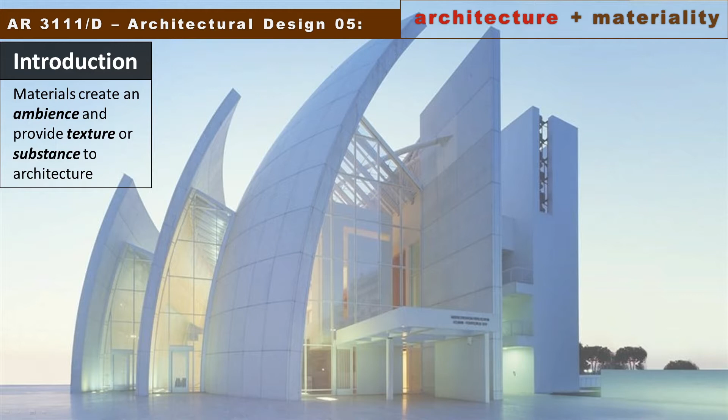Like a painter that uses different media to express his thoughts and imprint his style into his paintings, architects use materials to create an ambience and provide texture or substance to architecture, as can be seen in this rusty tin shed transformed studio in Sydney by Raffaello Rosselli, exemplifying material honesty.

Recycling the original corrugated metal sheets as a material palette in this composition provides its rustic industrial character, while the glass corner window implies modern formality. The wood planks of the gate bring it closer to nature.

In contrast, the Leslie L. Dan Pharmacy Building by Foster and Partners for the University of Toronto features a 20-meter high colonnaded circulation daylit space as a hub of undergraduate activities, encouraging interaction between students.

The main space owes its lightness and elegance to the use of glass and steel, as can be seen in its glazed facade made of frit glass.

Its main attraction is the two reflective silver-colored pods suspended within the main space, which change colors according to the light conditions, with LED lighting illuminating the pods, casting tints of hues on its sleek glass facade amidst a towering concrete colonnade, providing a striking focal point for the building.

You would see by the examples that different architectural characters can therefore be achieved through the use of different materials. Moreover, the availability of building materials dictates the construction methodology to be adapted for structural, functional, aesthetic, and of course economic concerns. So for me, materials and construction for architecture is a matter of architectonics.

To understand how to use materials effectively, a designer needs to have an understanding of precedent, or how materials have been used historically, and an awareness of innovations in material application. Both can provide a useful way to develop a range of design approaches.

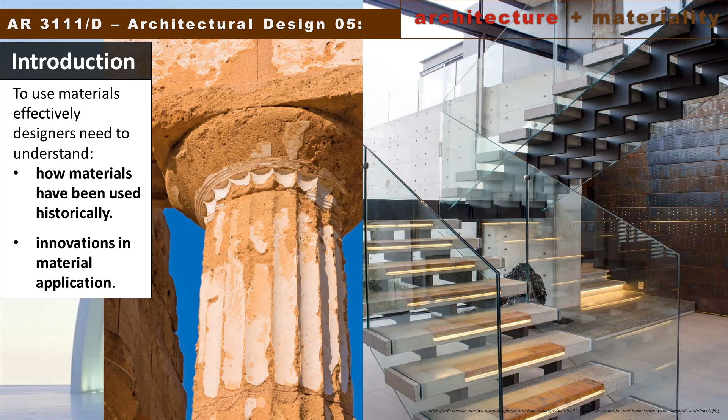Thus, for an architect, a sound understanding of construction methods and practices is essential. The architect needs to understand the nature of materials and their possibilities and limitations before they can be used to create buildings and spaces. Therefore, both history of architecture and building materials and construction courses are important parts of the architectural curriculum.

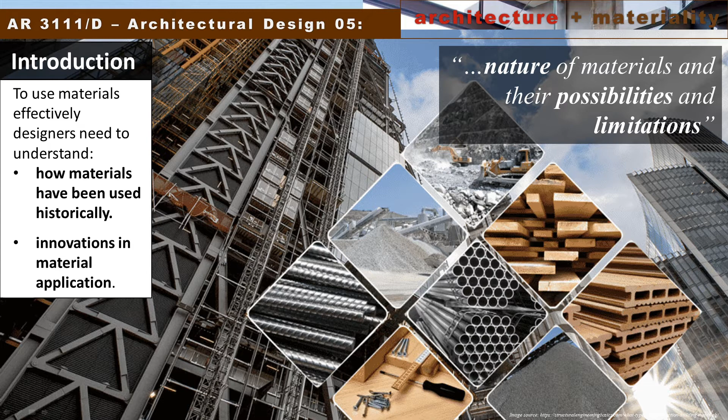And just to recall some of the types of building materials we covered in your history and building technology subjects, we discussed some of the types of materials, starting from brick and stone, concrete, timber, glass and steel, and composite materials. And to look back on our architectural history, here are just some of the chronology on how these materials were used.

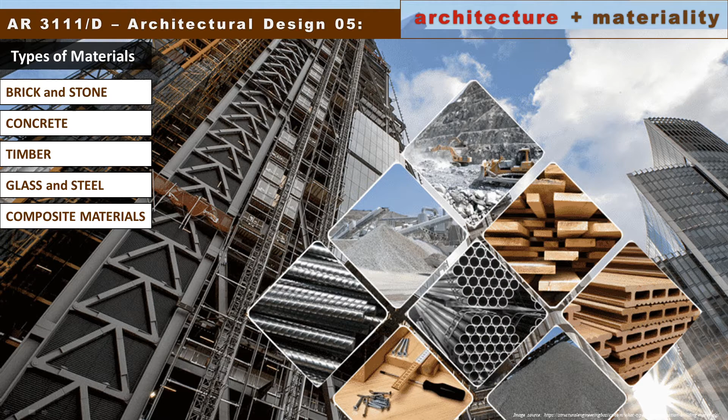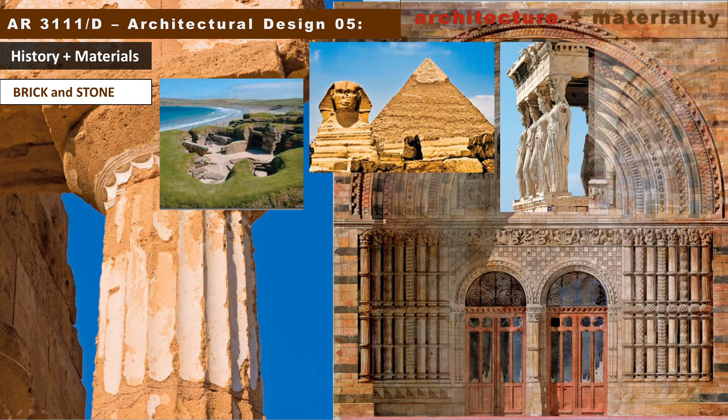Starting from brick and stone as used in the Neolithic era, ancient Egypt, classical Greece and Rome, medieval times, Renaissance, and to the modern times, we can see that stone has long been associated with permanence and solidity, thus providing the monumentality in the architecture of ancient civilization.

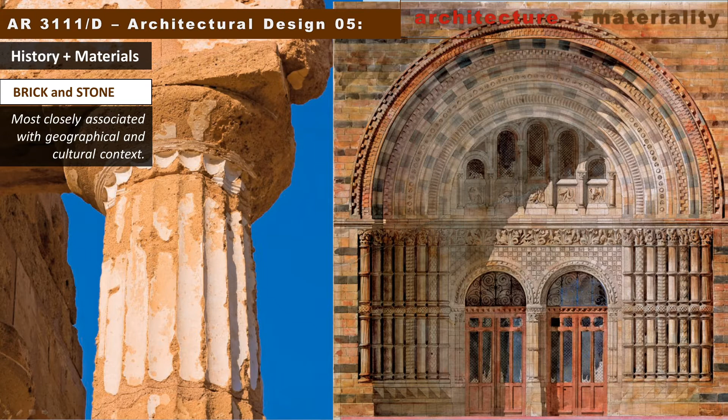Of all materials available to the architect, it is arguably the use of stone and brick that produces an architecture most closely associated with its geographical and cultural context, like in the Hoshino Stone Church by Kendrick Kellogg in his interpretation of organic architecture with the use of local stone, both for the interior and exterior.

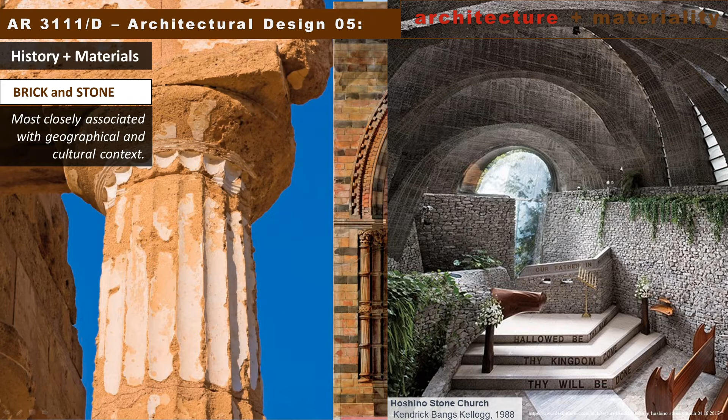We could see that both stone and brick can be used in a range of architectural applications, as both materials have a load-bearing potential to support their own weight or even more. They are used most effectively in constructing walls and for floor surfaces.

The Sagrada Familia by Antoni Gaudi, whose construction began in 1882 and is still to be completed, hopefully by 2026, was designed to challenge ideas of structure and celebrate the most incredible craftsmanship—that is, to carve and transform stone from a solid static material to a dynamic, expressive surface.

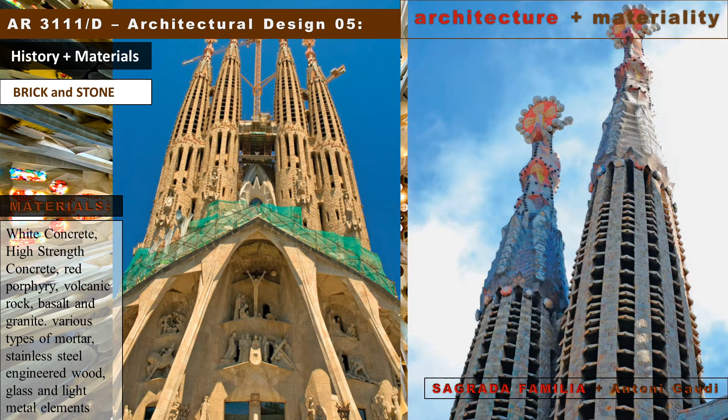White concrete was used for pillars and the surrounding walls, whereas high-strength concrete is used for pilasters, foundations, and pavements. Inside the basilica are long columns of red porphyry volcanic rock, while the small and dark columns are made of basalt and granite columns that project the exterior light.

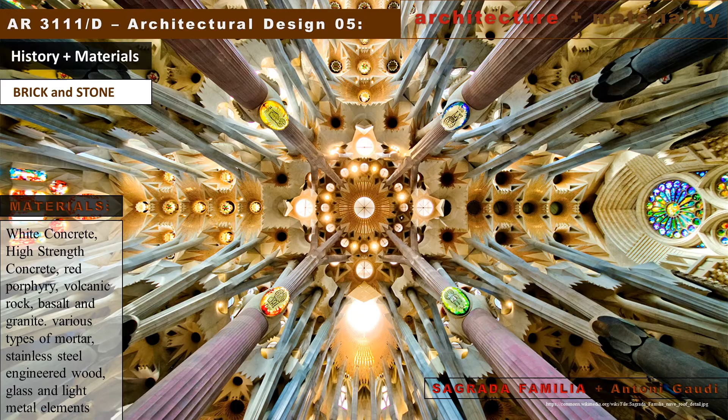This building exemplifies the potential that stone offers the architect, and the real possibility its use presents to create symbolic, iconic, and memorable structures. This leads us to our second material, which is of course the Roman invention of concrete.

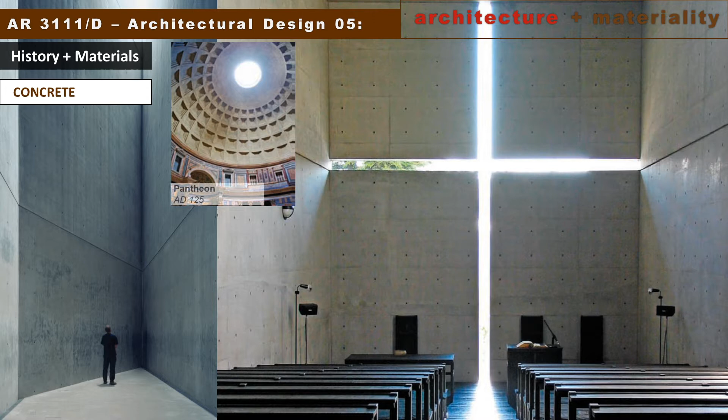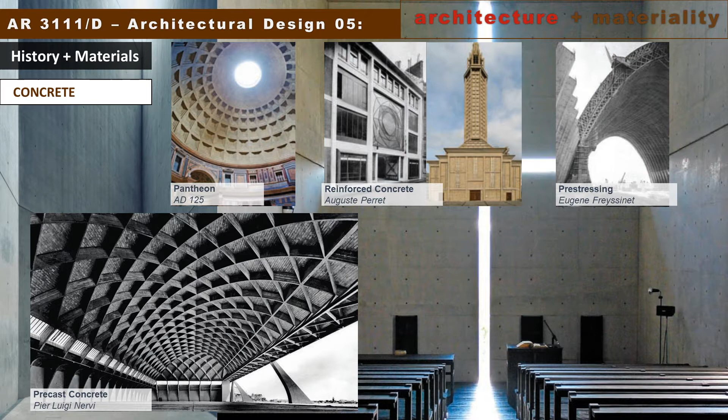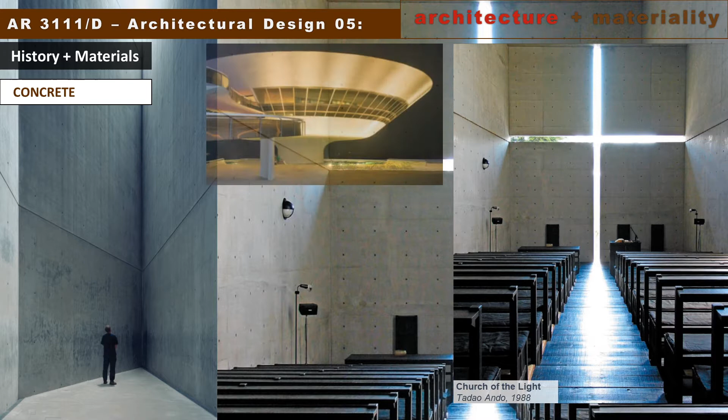From the Pantheon, the reinforced concrete of Auguste Perret, the pre-stressing technique of Eugène Freyssinet, with the reinforced and precast concrete technologies of Pier Luigi Nervi, to the expressionist form of Le Corbusier with his béton brut aesthetics, to the geometry, light, sculpture, and minimalism of Tadao Ando, to the futuristic space-age form of Oscar Niemeyer, the captivating designs of Santiago Calatrava's architectural structures, and to the dynamic sculptural organic forms of Zaha Hadid.

And the possibilities are limitless. You would notice that concrete offered the architects a material that could be molded to form new shapes, and one that, when reinforced with metal, could be used structurally to challenge ideas of building, form, and scale.

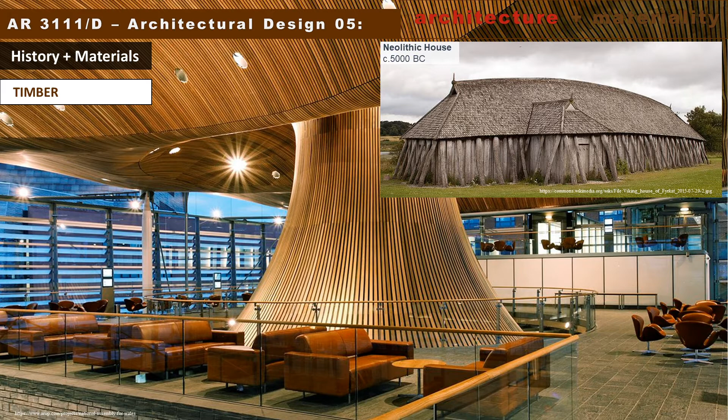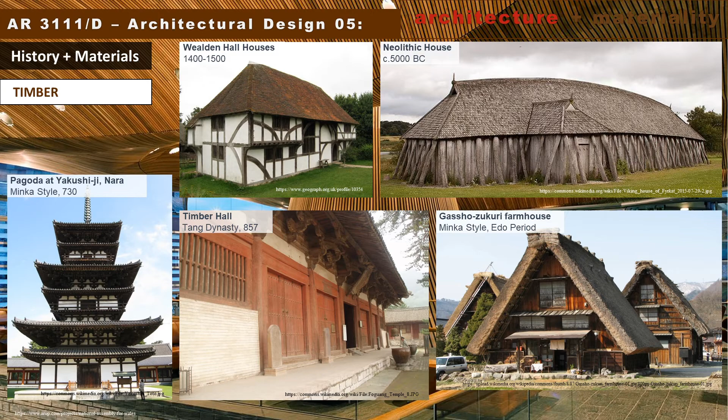We also have nature's best offering, timber. From simple thatch shed to the Neolithic longhouses of the Vikings resembling a ship, to the impressive intricate architecture of China and Japan, to England's Wealden houses for the yeoman classes, to the complex facades of timber-framed Tudor houses.

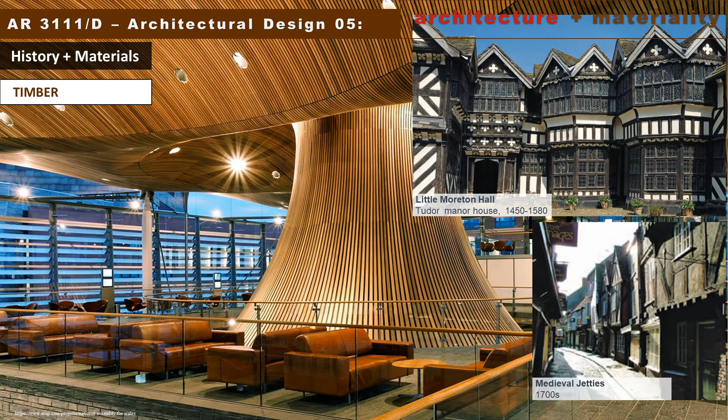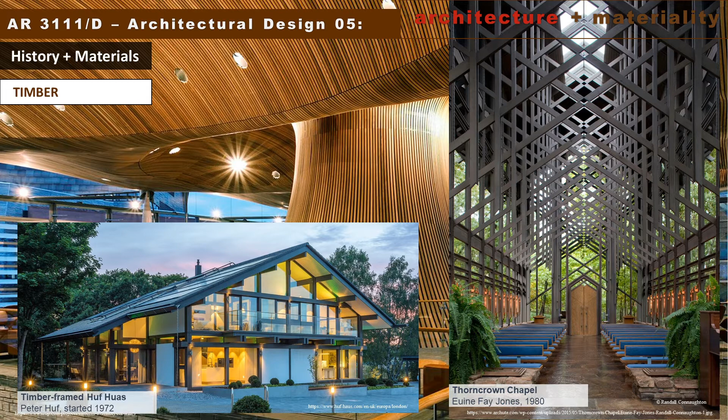To the static effect of overhanging timber jetties, to the American craftsman style design of Charles and Henry Greene for the Gamble House, to the factory-built timber frame houses of Huf Haus Company, which are individually crafted, to the remarkable glass and wooden structure of Euine Fay Jones.

Seen in his Thorncrown Chapel with its rhythmic wooden columns and trusses, to the seemingly floating Odate Jukai Dome, in which the wood plays a crucial role in bringing comfort and warmth as it beautifully embraces the space, designed of course by Toyo Ito.

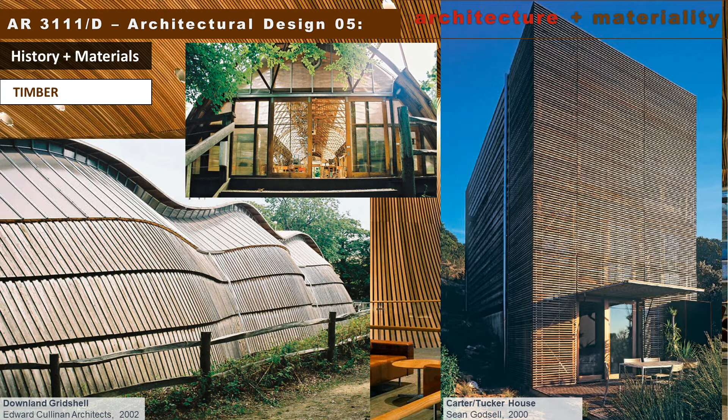And to the Carter or Tucker house that takes the form of a glass box, clad with slender cedar panels, designed by Sean Godsell, to the dramatic, light, and airy structure of the Downland grid shell by Edward Cullinan Architects.

And to the openness and transparency concepts of the Welsh Assembly Building by Richard Rogers Partnership, which was awarded the BREEAM Excellent rating for its environmental strategy, which includes boreholes, greywater recycling, and extensive use of natural light and ventilation. The partnership think that their design symbolized a new form of democracy of which the whole of Wales could be proud.

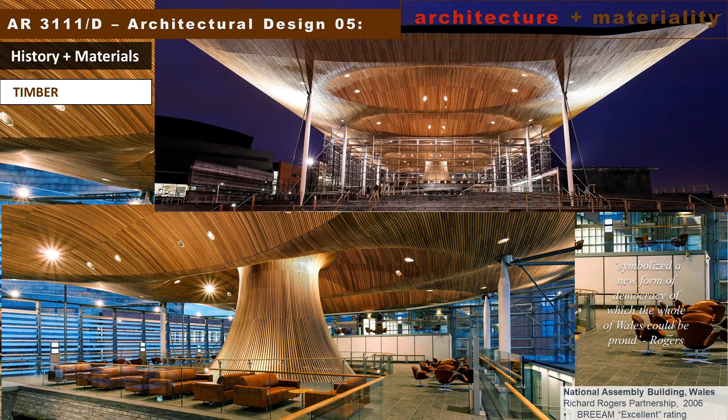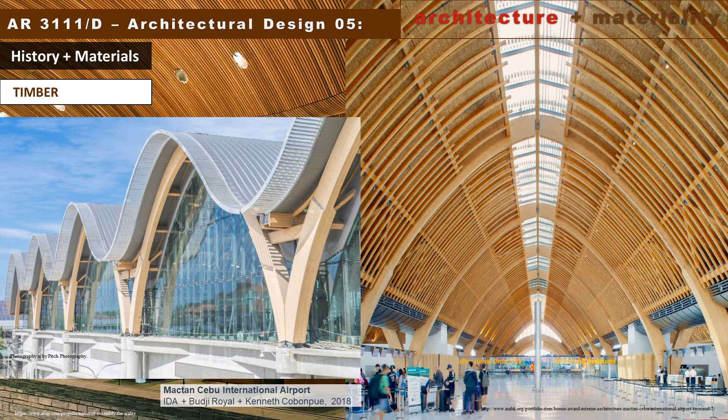To the timber arch supports of the wavy roof of Terminal 2 at Mactan Cebu International Airport, designed by Hong Kong-based studio Integrated Design Associates with support from local firm Budji Royal and industrial designer Kenneth Cobonpue.

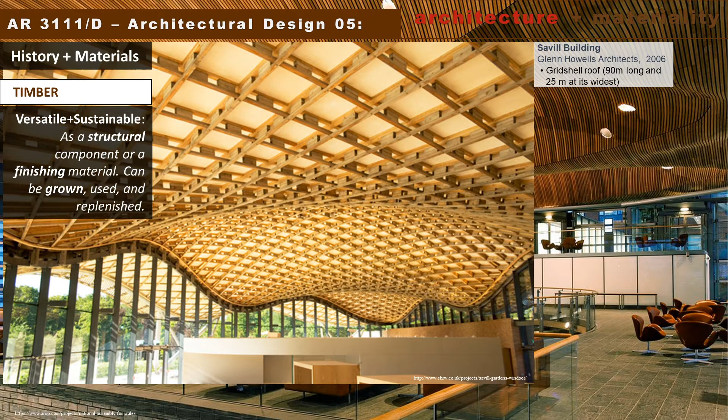It is obvious from these examples that timber is a versatile building material. It can be used to create a building skeleton structure or be utilized to great effect for external and internal finishes, thus offering the possibility to design and construct a building entirely of timber, from its frame and wall coverings.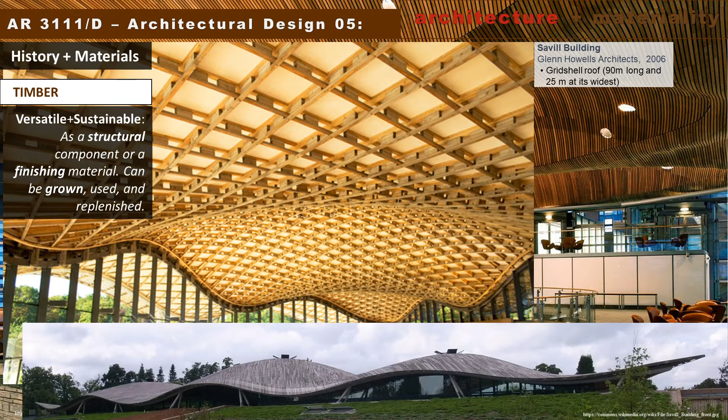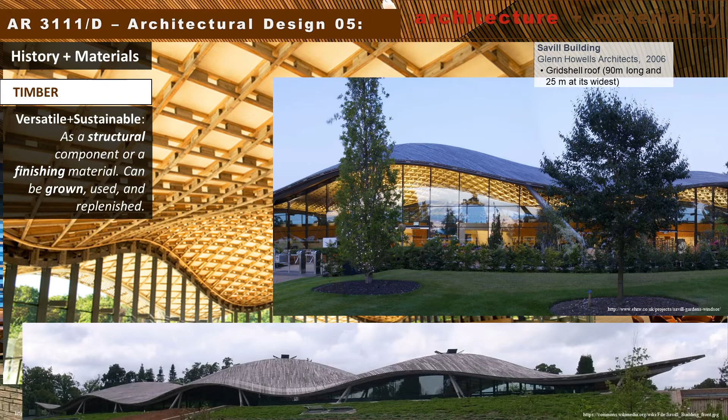To the roof. In addition to its versatility, timber is the ultimate sustainable material. If properly sourced, it can be grown, used, and replenished with little or no waste from its manufacture and production, as could be seen in the Aspen Art Museum by Shigeru Ban that has a ceiling entirely composed of interlocking wooden truss system.

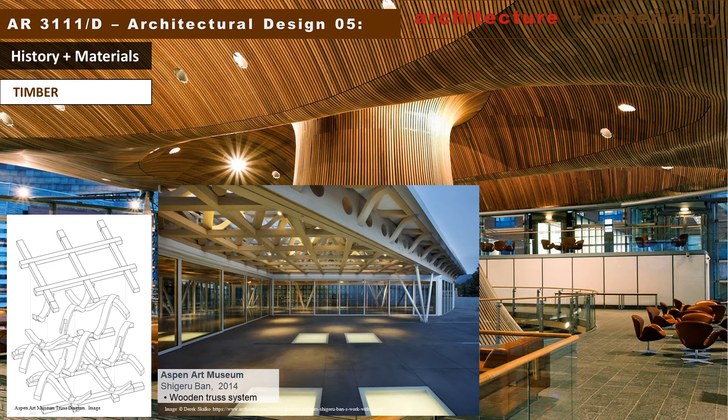There is a matter of aesthetics to consider as well. Shigeru Ban's favoritism for wood also springs from an appreciation for its color, texture, and visual malleability. The main hall of his Nine Bridges Country Club makes use of timber columns that add a warmth and texture to the room, counterpointing the interior concrete walls.

Timber also offers the architect more than just practical advantages. In an interview with the New Yorker, Shigeru Ban said that wood is the most ecological thing. Steel, concrete, we are just consuming from a limited amount. Timber is the only renewable material. Crucially, timber is a crop, and as such, it can be grown to replace and generate future reserves.

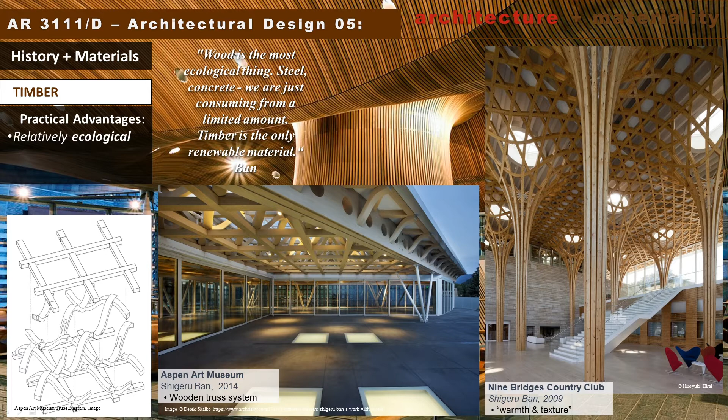This makes timber one of the most sustainable materials in the construction industry. As such, timber has responded well to the social and economical issues associated with construction and materials. The Consortium for Research on Renewable Industrial Materials has found that in life cycle analysis, wood outperforms steel by 17% and concrete by 16%.

Further, timber is an aesthetically rich material that can vary depending on the tree's species and type. Additionally, it has a natural beauty that over time can weather, a feature which can gradually add to a design scheme. A timber finish is ultimately flexible and can be adapted to suit a great number of possibilities, taste, and applications, as we can see in these examples.

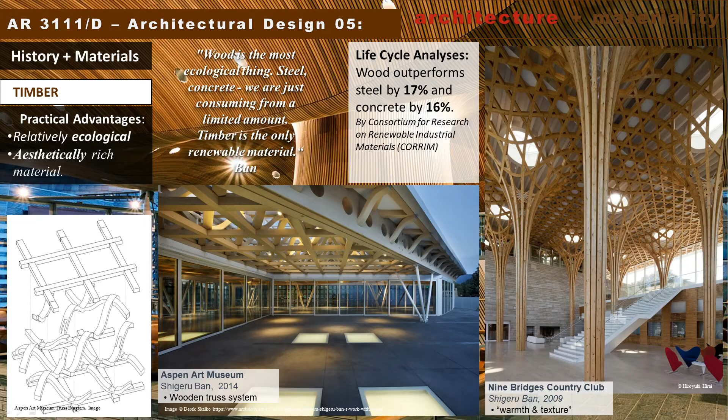Next material is glass and steel. From the humble beginning of glass from Syria to the use of stained glass in Gothic cathedrals, to the pivotal point of contemporary architecture through the Crystal Palace of Sir Joseph Paxton,

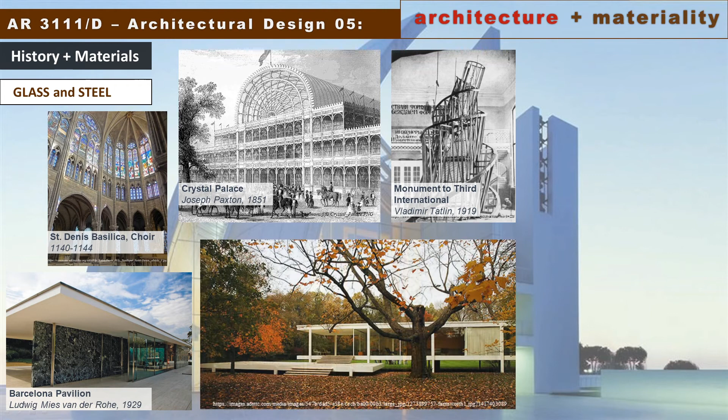showcasing the world's first prefabricated glass building constructed for the Great Exhibition in 1851, to the constructivist visionary architecture of Vladimir Tatlin for the monument to the Third International, and to the reductive approach of Mies van der Rohe for the Barcelona Pavilion, to his skin and bone metaphor for the Farnsworth House,

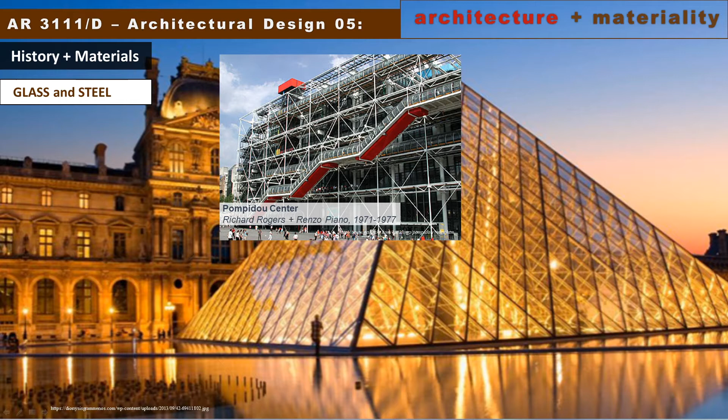and his less is more dictum of functional ideals as can be seen in the Seagram building, to the high-tech brutalist style of Piano and Rogers for their Pompidou Center, and to the cultural subtlety in Jean Nouvel's attention to facade detailing, a main feature and innovative element of the IMA is the advanced responsive metallic brise-soleil on the south facade.

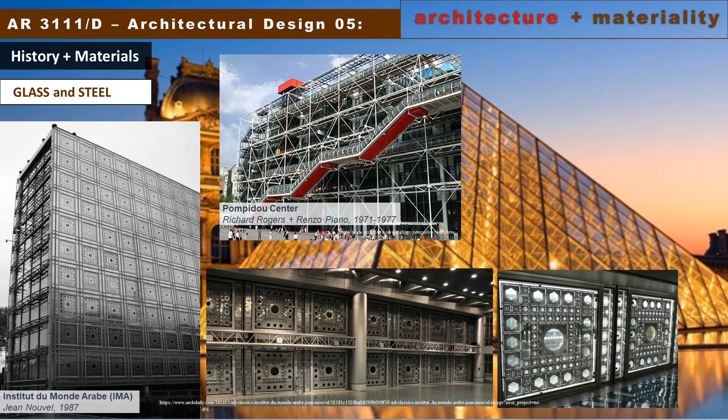Nouvel's proposal for this system was well received for its originality and its reinforcement of an archetypal element of Arabic architecture, the mashrabiyah. He drew inspiration from the traditional lattice work that has been used for centuries in the Middle East to protect the occupants from the sun and provide privacy.

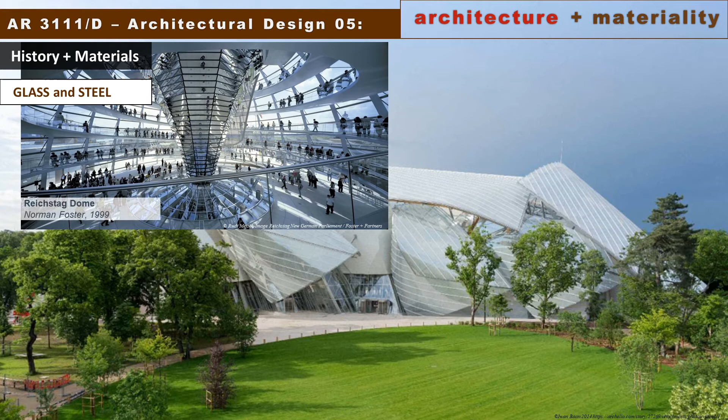And of course, to the minimalist expression of I. M. Pei for the Platonic shape of the Louvre pyramid, and the high-tech glass dome of Foster and Partners for the Reichstag Parliament building, and their British Museum with its undulating minimal steel lattice work supporting around 3,312 triangular glass panels, aside from, of course, their skyscrapers using glass and steel.

Another striking lattice work with its shell-like diagrid roof is the Western Concourse of King's Cross Station by John McAslan and Partners. And of course, the deconstructivist style of Frank Gehry for the Louis Vuitton Foundation Museum with its 12 immense glass sails supported by wooden beams.

The sails give the museum a sense of transparency and movement. As seen with these examples, glass and steel represent a manufactured form of architecture.

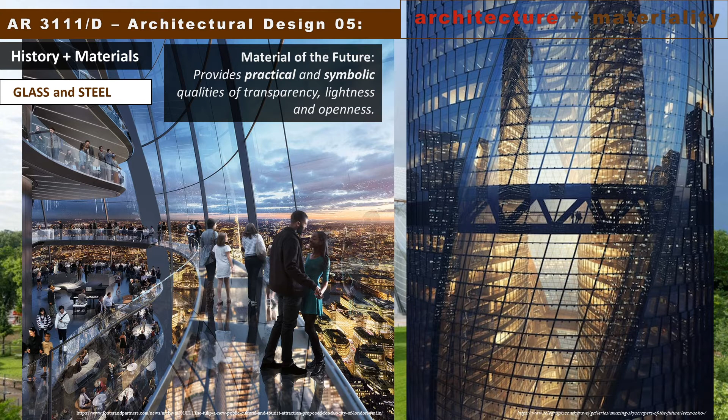These are materials that are used frequently in contemporary architecture to produce buildings that are both functional and practical. Yet, the aesthetic possibilities with glass and steel are impressive. The architecture that utilizes these materials can become almost invisible, framing views of landscape or sky, or transport us to the height of a bird soaring above a city. Glass is the material of the future and provides both practical and symbolic qualities of transparency, lightness, and openness.

And lastly, on the types of materials are what we call composite materials, since their properties can be engineered to respond to particular design conditions. For example, they may be especially durable, strong, or waterproof, depending on the requirements. The key advantage of using composite materials in architectural design is that they are hugely flexible. By varying their composition and constituent parts, different solutions for different projects can be found.

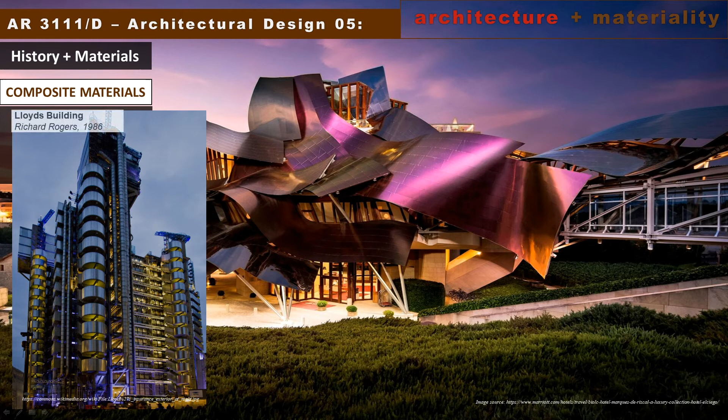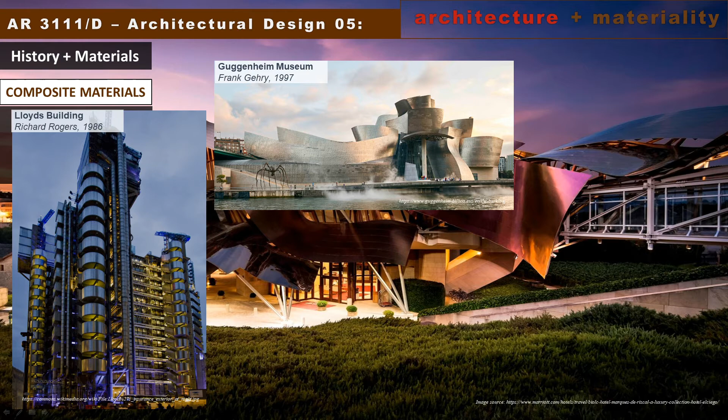Starting with Richard Rogers' machine-like aesthetics of the Lloyd's building, made of interlocking prefabricated elements, to the sculptural dynamic shape of the titanium-clad Guggenheim Museum in Bilbao, Spain by Frank Gehry, to the PTFE roof of the O2 Arena, again by Richard Rogers,

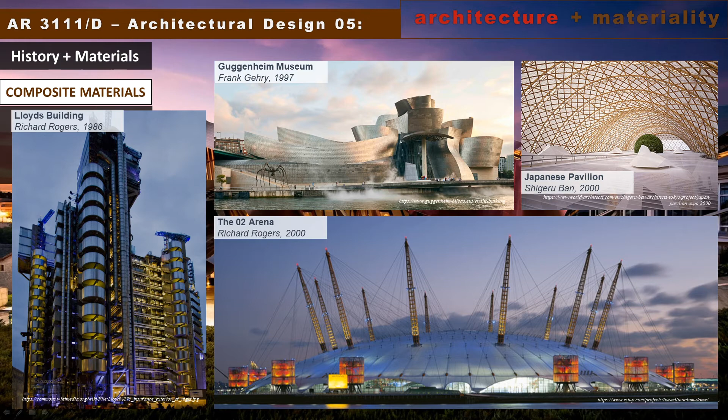to the Japanese Pavilion by Shigeru Ban, constructed with a long grid shell structure made from paper tubes, and to the ETFE glazed volumes of the Eden Project by Grimshaw Architects, to the chainmail aesthetics of Selfridges store, clothed with thousands of aluminum discs designed by Future Systems, to the blob architecture of Peter Cook and Colin Fournier for the Kunsthaus with its reinforced concrete framework covered with blue plastic to give its organic form,

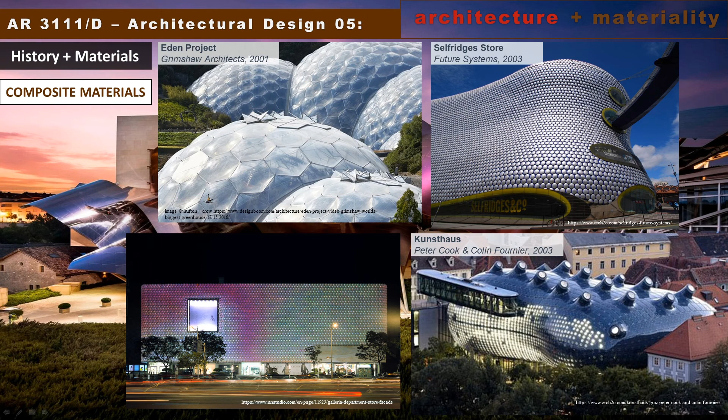to the ever-changing media facade of the Galleria department store by UN Studio using 4,330 glass discs with dichroic foil and illuminated LED lights at night, creating a multitude of aesthetic effects. Composite materials have been adapted from their original form to create engineered hybrids that can serve multiple functions in building design.

Materials that combine the aesthetic qualities of wood with the durability of plastic are now available, and that's because of the advances in material science and technology, as well as the sophisticated multiple functionality they can offer.

Composite materials are often specified by architects as a substitute for costly natural materials. Composite materials range from plastics, as with the ETFE-clad Beijing National Aquatic Center by Arup and PTW architects, to carbon fibers, as with the University of Stuttgart's pavilion made from advanced fiber composites of carbon fiber reinforced plastics.

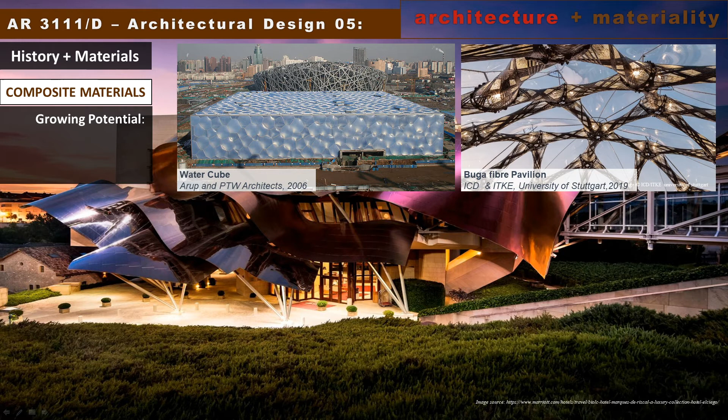The future of composite materials in construction is bright, as material technology allows us to better understand their potential. The application of composite materials in new contexts is growing. Many of these materials find their origins in areas outside of architecture and construction, but inventive thinking and cross-discipline collaboration is bringing them into the world of building design.

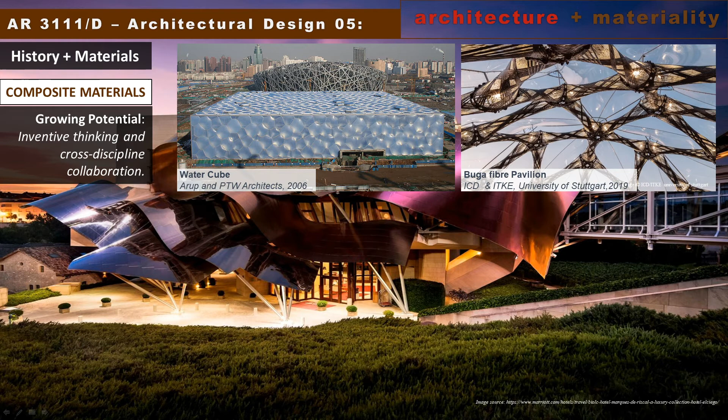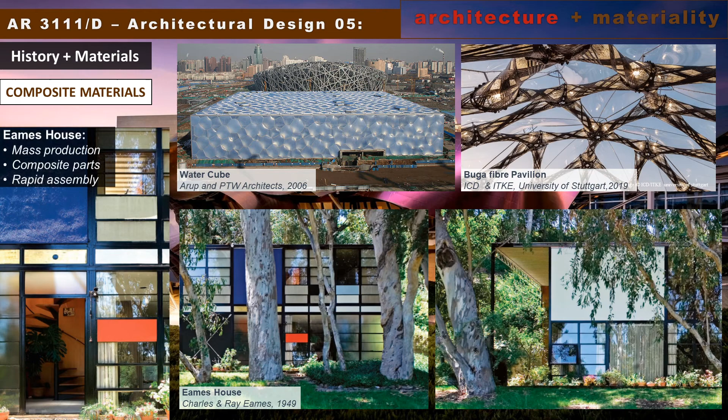This idea of collaboration was popularized by Charles Eames and Ray Eames in 1945. In the post-war housing problems of America, they designed Case Study House Number 8 in an attempt to reemploy workers and factories that had supported the production of wartime armaments and aircraft. The design of the Eames house responded to ideas of mass production, composite parts, and rapid assembly.

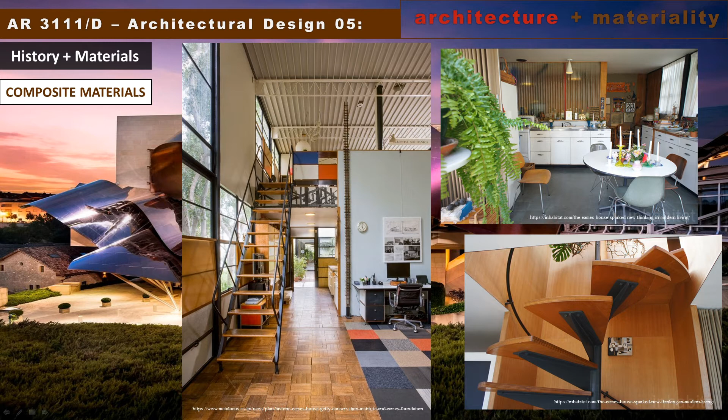In the Eames house, most of the materials were prefabricated and shipped to the site, where a construction crew of 8 men assembled the 11 tons of factory steel and glass in just over a day and a half. The overall cost was approximately $1 per square foot during that time, or about $10 per square foot today, or roughly around 5,000 pesos per square meter.

Their materials include concrete, ferroboard, cemesto, glass, Voltex, paint, plyon, plywood, tallow wood, wood floor parquet, rubber or vinyl tiles. They accomplished this remarkably low-cost house using relatively inexpensive prefabricated materials and by compartmentalizing the design in order to simplify construction.

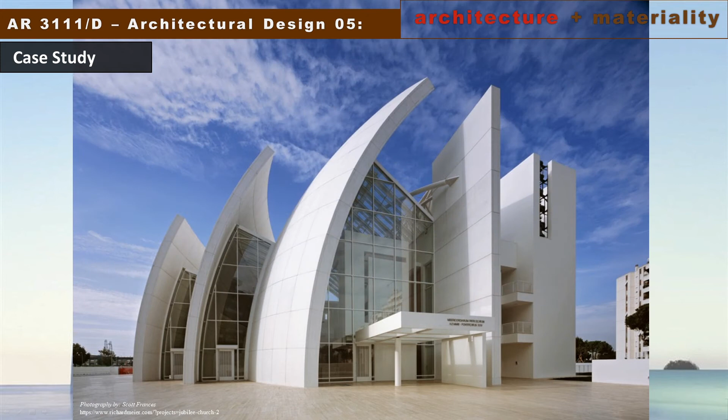And to conclude, we take a look, of course, at our featured front cover, the Jubilee Church, designed by Richard Meier. The church showcased a masterful interplay of glass, stucco, Roman travertine, white concrete, and wood paneling to achieve an architectural masterpiece. The commission was won in a competition against other masters including Tadao Ando, Santiago Calatrava, Peter Eisenman, and Frank Gehry.

Its most distinctive feature is the 3 curved shell walls or sails made from concrete shells with marble-like finish, reinforced with steel, and held together by post-tension cables horizontally and vertically. The 3 circles of equal radius generate the profiles of the 3 concrete shells that, together with the spine wall, make up the body of the nave.

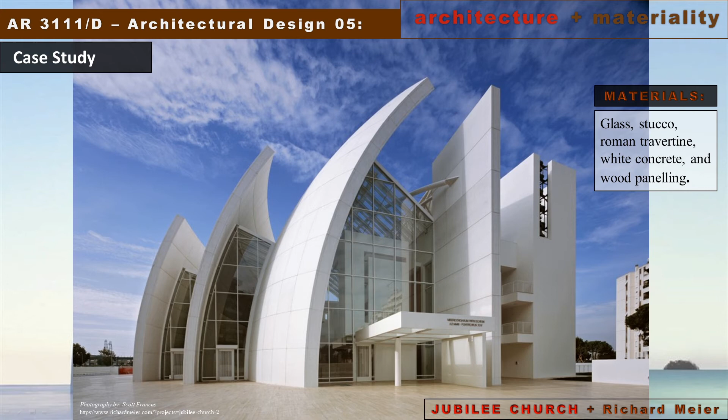These freestanding sails symbolize the Holy Trinity and are designed to withstand forces of nature from heat, wind, and of course earthquakes. The materials used in the portico, the paving, the wall cladding, and the liturgical furniture allude to the body of Christ Church, while referencing the fabric of the adjacent residential area.

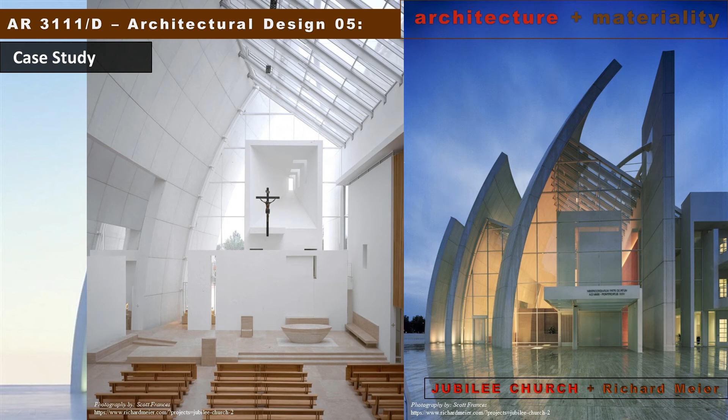In the interior, indirect sunlight filtered through a series of glazed skylights suspended between the shells are lit by zenithal sidelight, and the nave is enlivened by a constantly changing pattern of light and shade. The light is also diffused over the inner volume of the church and varies according to the hour, the weather, and the season, imparting a particular character to the aspects of the interior.

The interior materials of light wood paneling and simple beechwood pews contrast with the stucco organ loft and the white cross. The roof of the nave and eastern and western facades are glass, while the altar plinths, baptismal font, and the altar are made from travertine, similar with the nave floor.

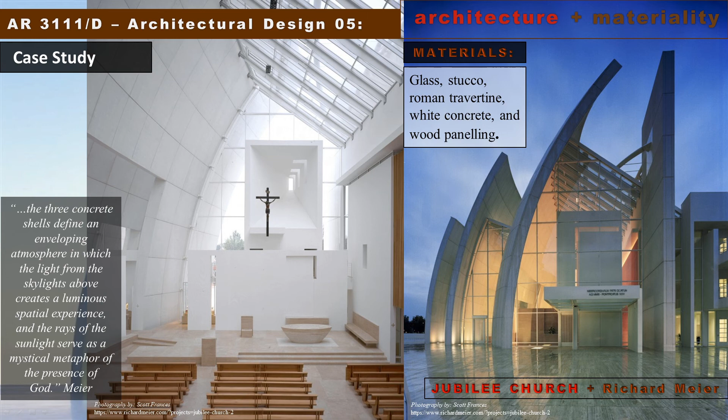In the Jubilee Church, from the words of Meier, the three concrete shells define an enveloping atmosphere in which the light from the skylights above creates a luminous spatial experience, and the rays of the sunlight serve as a mystical metaphor of the presence of God.

So, indeed, materials create an ambience and provide texture or substance to architecture. With the plethora of available materials in the arsenal of architects, extending the possibility of design potential, we need to look at future directions of using materials considering innovations and sustainability. Thus, smart materials that are energy efficient as well as nanotechnology, among others, should be explored by designers as part of their ever-changing palette.